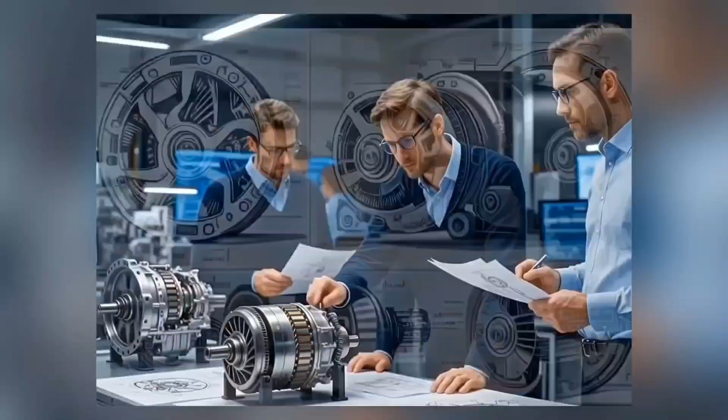These are the engineers who think they've solved the 60-year-old puzzle that killed the rotary engine. They're betting everything that their new designs will revolutionize transportation at the exact moment electric vehicles are taking over the world. The rotary engine has always been the automotive industry's beautiful failure.

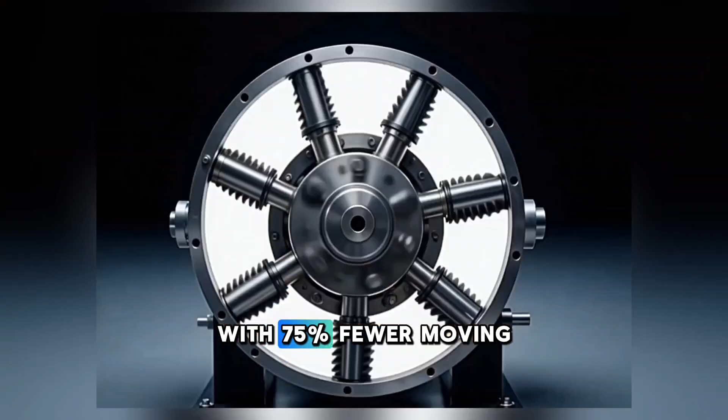Felix Wankel invented it in 1957, and it promised to change everything with 75% fewer moving parts than a traditional piston engine. Instead of pistons pumping up and down, a triangular rotor spins inside an oval chamber, creating power with buttery smooth operation. For decades, only Mazda kept the dream alive with their RX series sports cars.

But in 2012, when the last RX-8 rolled off the production line, it seemed like the rotary engine was dead forever. Now, something unexpected is happening.

In the last 2 years, a wave of startups and established companies have suddenly started pouring millions into rotary engine development. The U.S. Army just handed LiquidPiston a $30 million contract in January 2024.

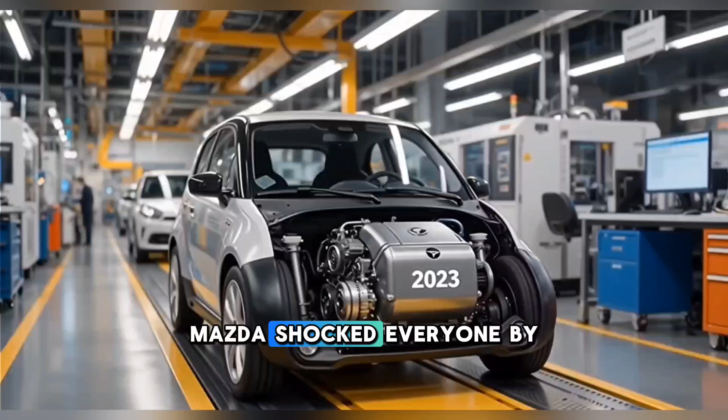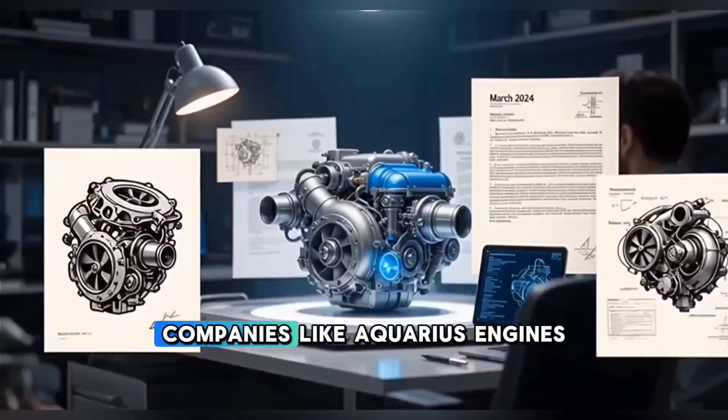Mazda shocked everyone by putting a rotary engine back into production with their MX-30 REV in 2023. Astron Aerospace revealed their Omega-1 hydrogen rotary in March 2024. Companies like Aquarius Engines and INNengine are racing to patent their own revolutionary designs.

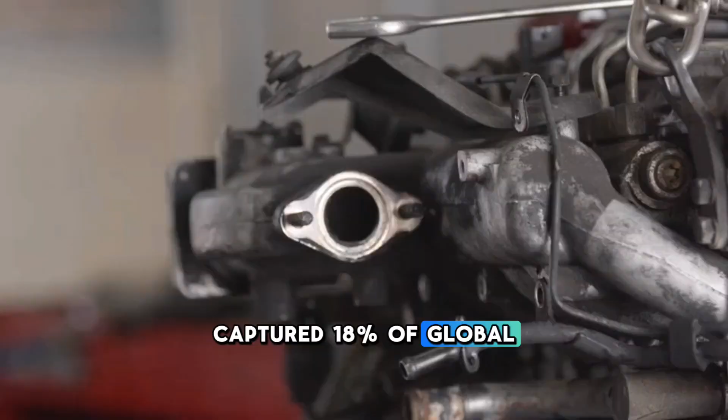Why now? Why are these engineers convinced they can succeed where decades of attempts failed? And what makes them think they can compete in a world where electric vehicles already captured 18% of global car sales in 2023? The answer starts with understanding why rotary engines failed in the first place.

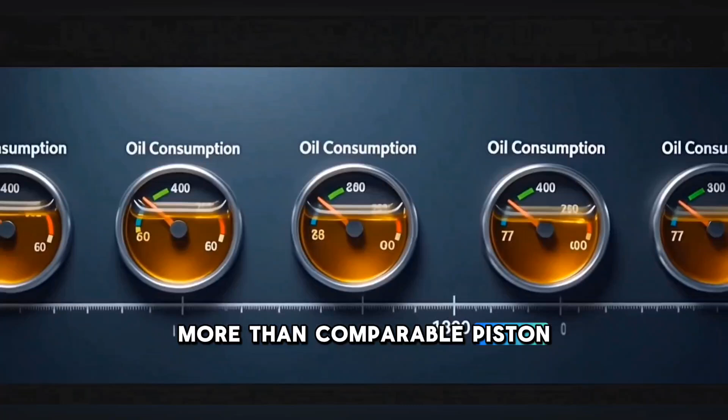If you owned one of those Mazda RX-7s or RX-8s, you know the heartbreak. These engines guzzled fuel like they were dying of thirst, burning 20 to 40% more than comparable piston engines. They consumed oil at an alarming rate, typically going through a quart every 1,000 to 2,000 miles.

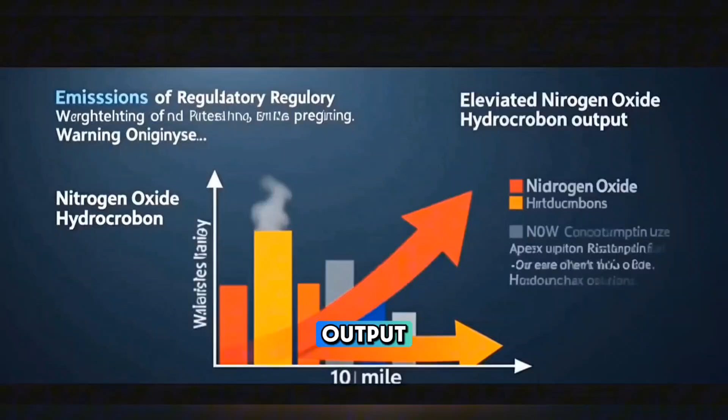The apex seals, those critical components that separate the combustion chambers, would wear out around 80,000 to 100,000 miles, and the emissions, high nitrogen oxide and hydrocarbon output, made them environmental nightmares in an era of tightening regulations.

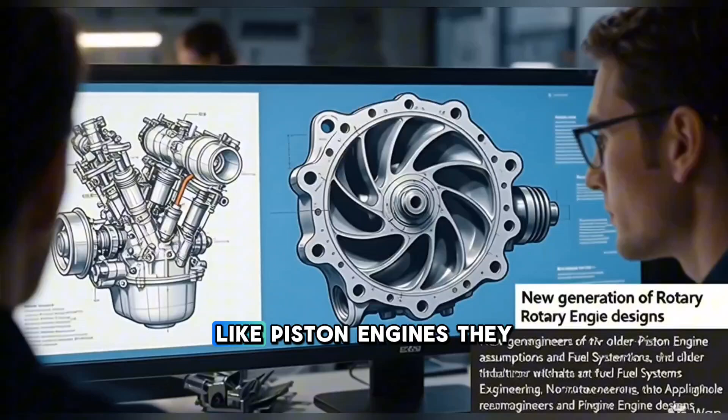But here's what the new generation of engineers realized. Every one of those problems stemmed from trying to make rotary engines work like piston engines. They were using the wrong fuel, the wrong applications, and the wrong expectations.

The breakthrough came when they stopped trying to fix the old problems and started exploiting the rotary's unique advantages. Take LiquidPiston, founded by the Shkolnik brothers, Alexander and Nikolay.

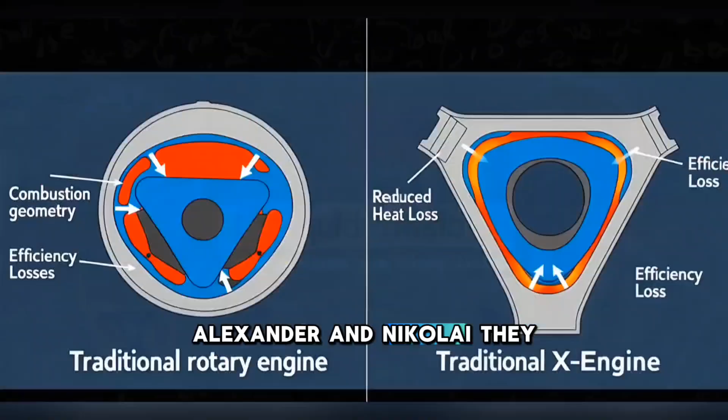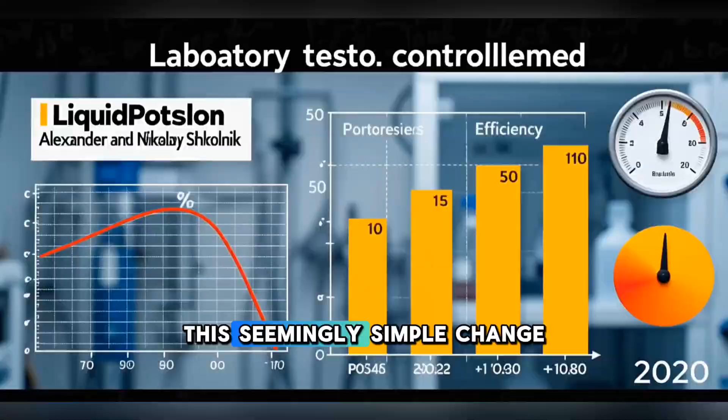They flipped the entire design inside out with their X-engine technology. Instead of a triangular rotor in an oval housing, they use an oval rotor in a triangular housing. This seemingly simple change addresses the fundamental efficiency problems that plagued traditional rotaries.

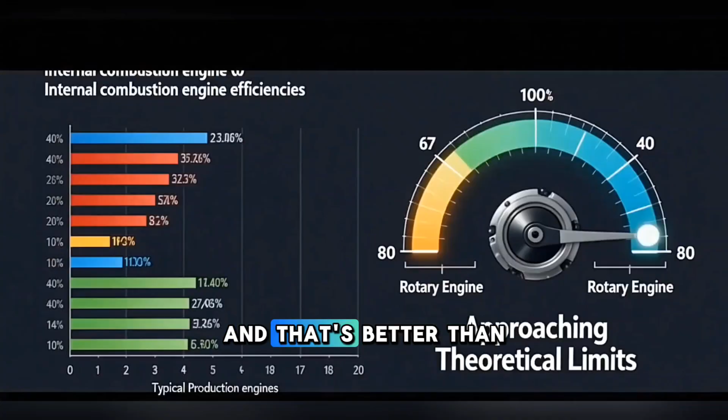In 2020, they demonstrated 70% thermal efficiency in laboratory conditions, and that's better than any production car engine and approaching the theoretical limits of internal combustion.

"We're not trying to compete with EVs, we're complementing them," Alex Shkolnik explained in a recent interview, and that's the key insight driving this rotary renaissance.

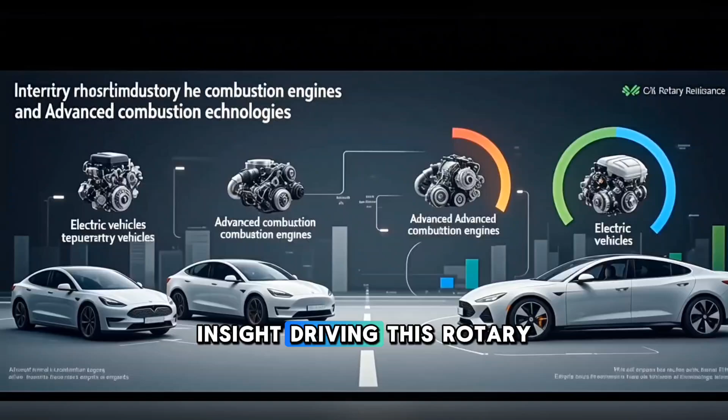These engineers aren't trying to replace your Tesla. They're targeting applications where batteries struggle. Consider the military's interest. That $30 million contract LiquidPiston received, it's for portable generators that soldiers can carry into the field.

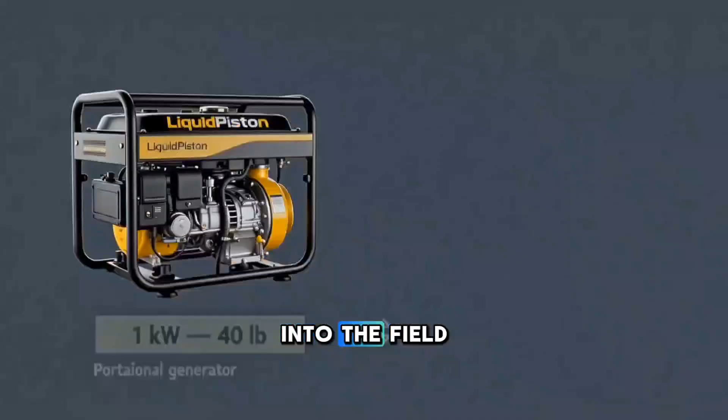A traditional generator that produces 1 kilowatt of power weighs about 40 pounds. LiquidPiston's rotary design delivers the same power at just 4 pounds. When you're carrying equipment through hostile territory, those 36 pounds matter.

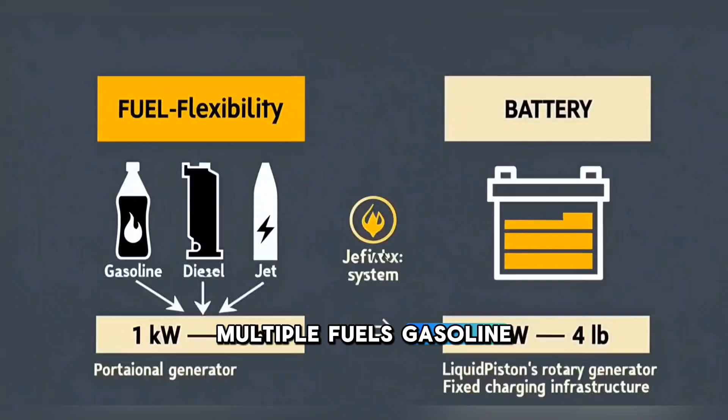The engine runs on multiple fuels: gasoline, diesel, jet fuel, whatever's available. Try doing that with a battery that needs specific charging infrastructure.

But the real game changer might be hydrogen. Mazda's engineers discovered something crucial. The rotary engine is ideal for hydrogen combustion, as one of their engineers stated in 2023.

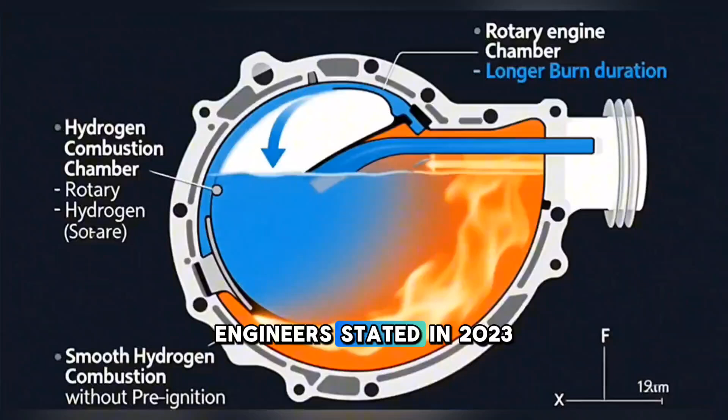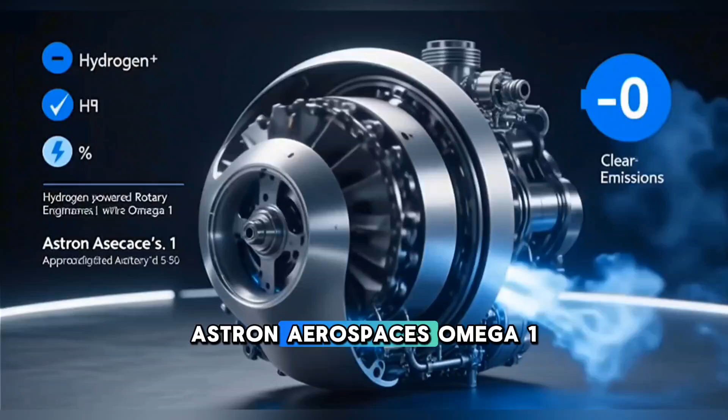The rotary's combustion chamber shape and longer burn duration solve the pre-ignition problems that make hydrogen difficult to use in piston engines. Astron Aerospace's Omega-1 takes this to the extreme, a hydrogen-powered rotary that they claim produces near-zero emissions.

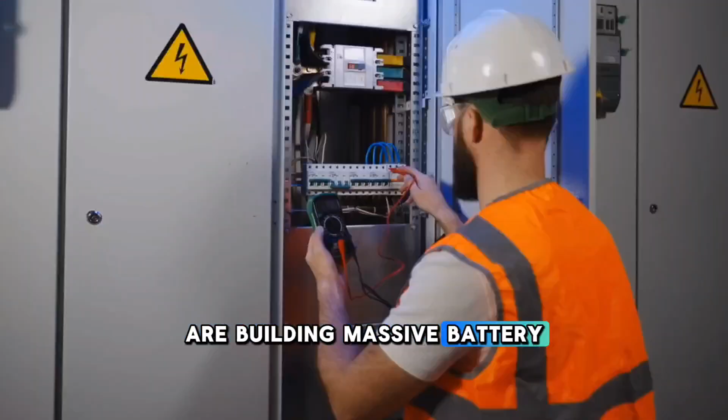This is where the story gets interesting. While Tesla and other EV manufacturers are building massive battery factories, these rotary developers are preparing for a different future. They're betting that the world needs more than one solution to transportation.

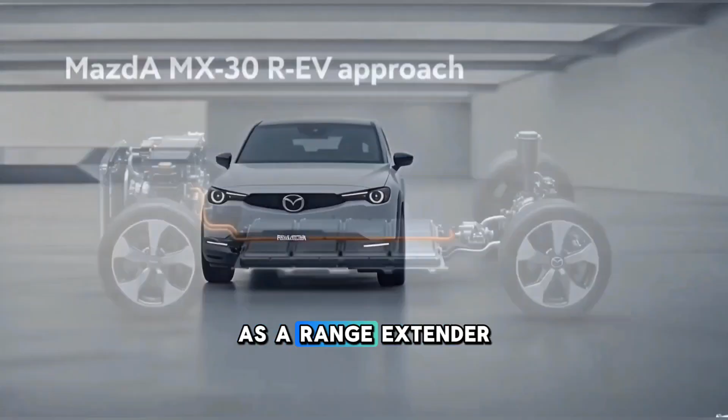Look at Mazda's approach with the MX-30 REV. It's not a pure rotary car, it's an electric vehicle with a small rotary engine as a range extender. The rotary doesn't drive the wheels, it generates electricity to charge the battery.

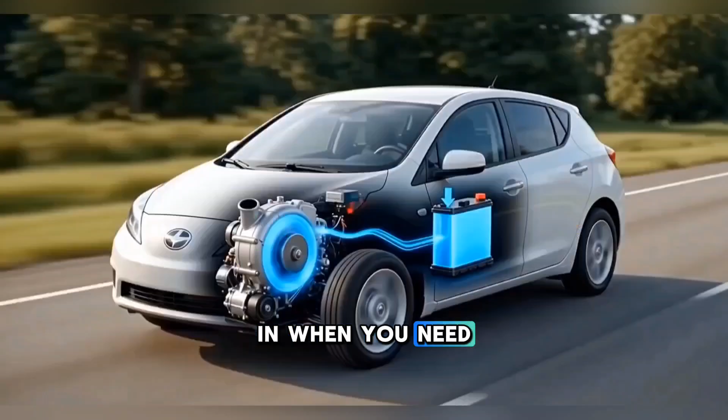This solves the EV's biggest weakness, range anxiety, while keeping the smooth, quiet electric driving experience. The rotary only kicks in when you need extra range, running at its optimal efficiency point.

The numbers tell a sobering story about the EV revolution. Yes, 14.2 million electric vehicles were sold globally in 2023. Yes, the International Energy Agency projects EVs will capture 60% of new car sales by 2030. Battery costs have plummeted 90% since 2010.

The momentum seems unstoppable. But dig deeper and cracks appear. The electrical grid struggles to handle rapid EV adoption.

Charging infrastructure remains spotty outside major cities. Battery production depends on lithium, cobalt, and rare earth elements with problematic supply chains. Cold weather can slash EV range by 40%.

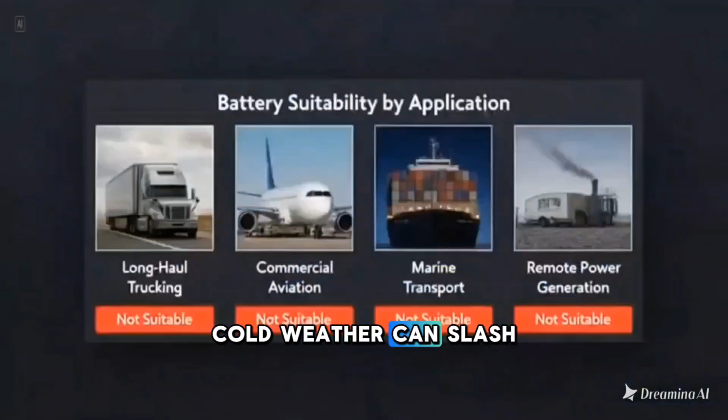For many applications, long-haul trucking, aviation, marine transport, remote power generation, batteries simply don't work. This is the opportunity these rotary engineers see. Not killing the electric vehicle, but filling the gaps batteries can't reach.

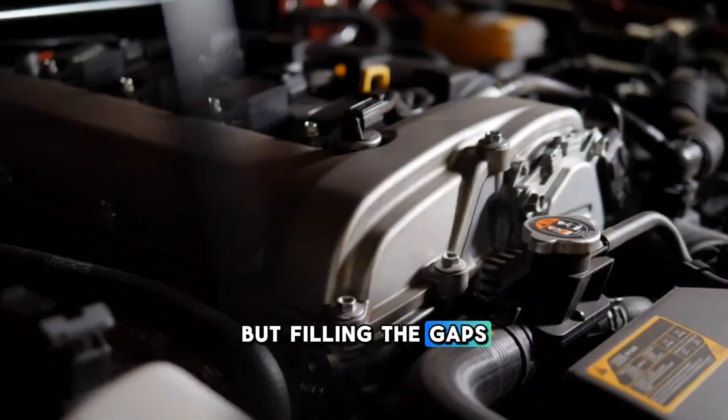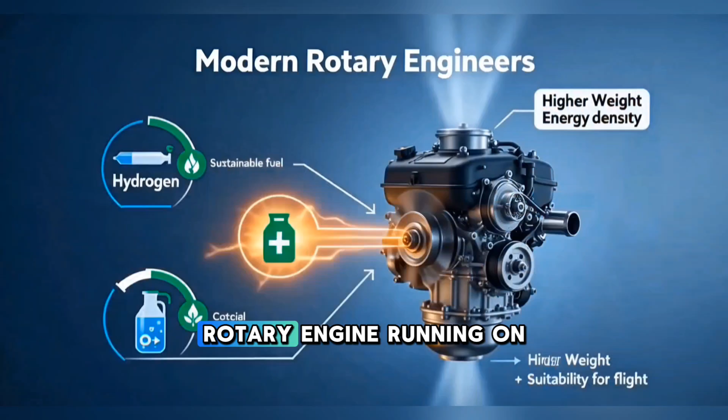Consider the aviation angle. Batteries are too heavy for aircraft. Every pound matters when fighting gravity. But a compact, lightweight rotary engine running on hydrogen or sustainable aviation fuel, that could work. Several companies are already developing rotary engines for urban air mobility vehicles and drones.

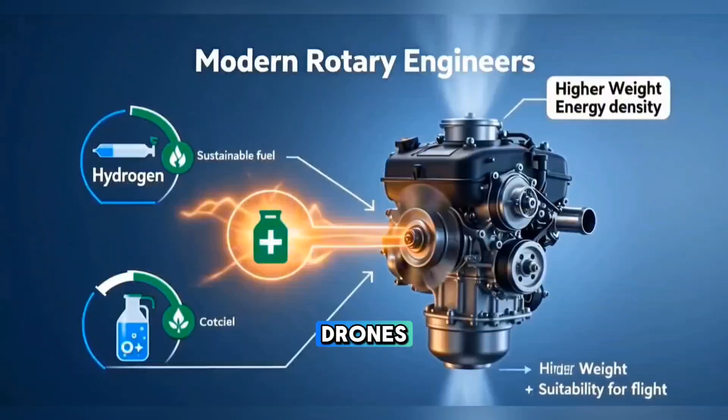Or look at backup power generation. When the Texas power grid failed in 2021, EV owners couldn't charge their cars. But a small rotary generator running on natural gas or propane could keep your home powered for days.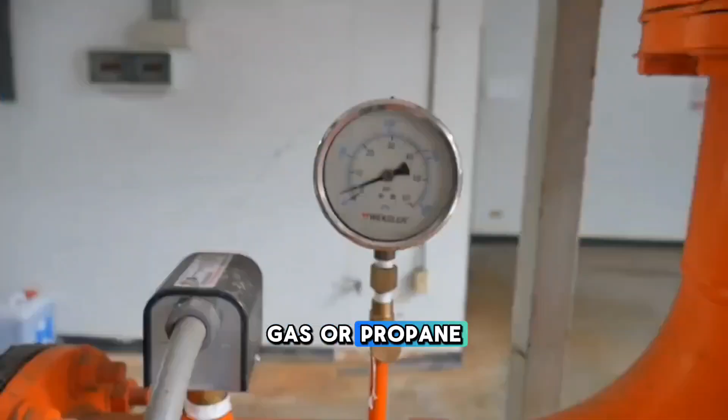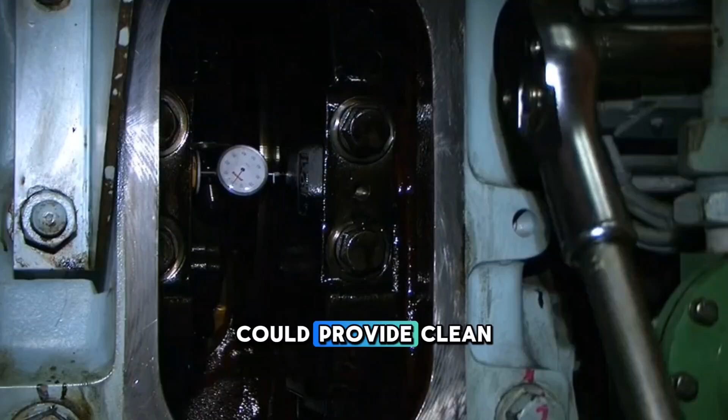The compact size means it fits where traditional generators can't. The marine industry presents another opportunity. Electric boats work fine for short trips, but crossing an ocean on battery power isn't realistic. A hydrogen rotary engine could provide clean, long-range propulsion for ships.

Even in automotive applications, rotary engines might find new life in unexpected places. Performance enthusiasts have always loved rotary engines for their high-revving character and unique sound. What if future sports cars combine electric motors for instant torque with a high-revving rotary for extended track sessions?

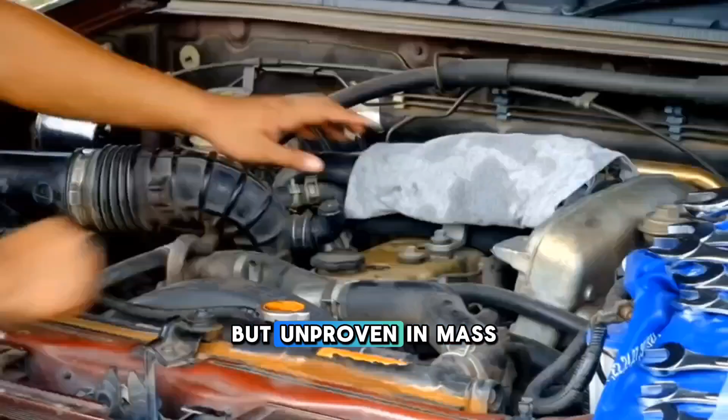But let's be honest about the challenges. Sixty years of failure cast a long shadow. Those apex seal problems? Still not completely solved, though new materials and manufacturing techniques show promise. The efficiency improvements? Impressive in labs but unproven in mass production. The hydrogen infrastructure? Even less developed than EV charging networks.

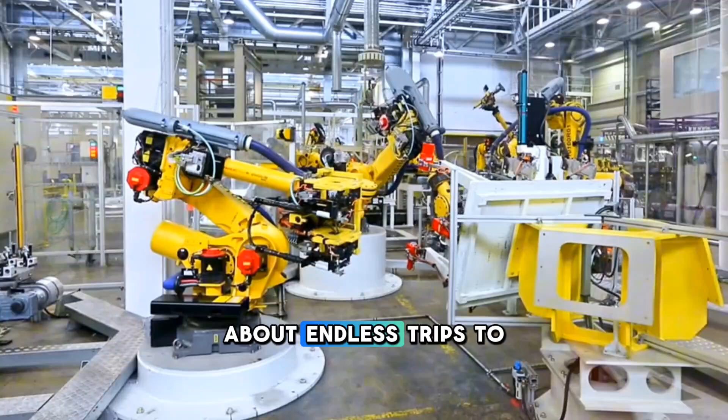The biggest challenge might be perception. Mention rotary engines to anyone who owned an RX-8 and they'll tell you about endless trips to the mechanic. Convincing consumers to trust a technology that burned them before won't be easy.

There's also the uncomfortable truth about market dynamics. The automotive industry has invested hundreds of billions in electrification. Major manufacturers have announced end dates for internal combustion production. Entire supply chains are reorganizing around batteries and electric motors. A few startups with clever rotary designs can't reverse that momentum.

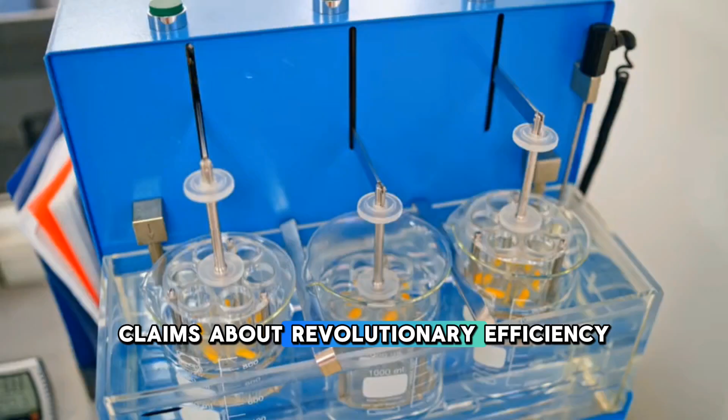Some claims circulating about these new rotary engines deserve skepticism. Despite what clickbait headlines suggest, there's no evidence Elon Musk has commented on any specific rotary engine development. Claims about revolutionary efficiency breakthroughs that will end the EV era are marketing hyperbole, not engineering reality. Most of these new rotary engines target hybrid systems or specialty applications, not direct EV replacement.

So where does this leave us? The rotary engine story isn't about defeating electric vehicles, it's about finding its place in an electrified world. These new developments suggest that place might be larger than anyone expected.

The military applications seem most promising in the near term. Portable power generation, unmanned aerial vehicles, and auxiliary power units benefit from the rotary's power density.

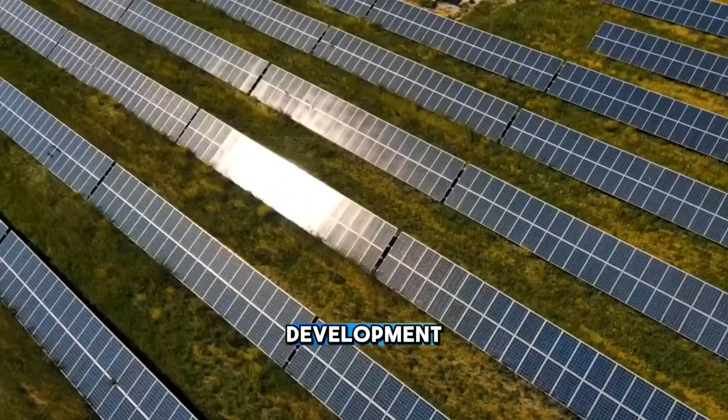Hydrogen combustion represents the biggest wildcard. If hydrogen production becomes cheap and clean through renewable energy, hydrogen rotaries could provide long-range, zero-emission transportation for applications where batteries struggle. But that's a big if, depending on infrastructure development that makes EV charging look simpler by comparison.

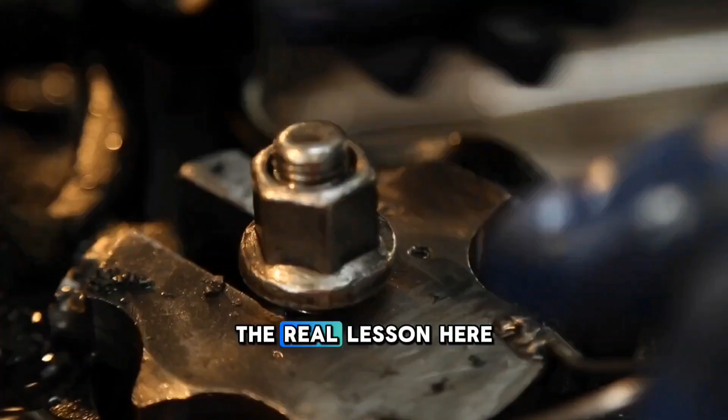The real lesson here isn't about rotary engines or electric vehicles. It's about the danger of technological absolutism. The future of transportation won't be all electric any more than it will be all rotary or all hydrogen. Different applications demand different solutions.

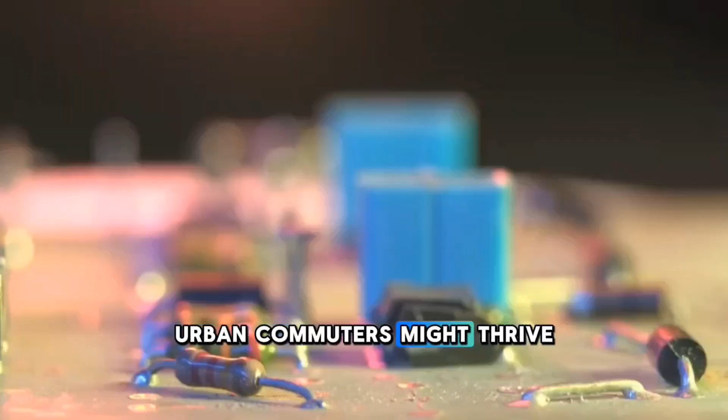Urban commuters might thrive with pure battery electric vehicles. Long-haul truckers might prefer hydrogen fuel cells. Remote communities might depend on multi-fuel rotary generators. Performance enthusiasts might choose hybrid rotary electric sports cars. The winners will be companies that recognize this diversity and develop appropriate technologies for each niche.

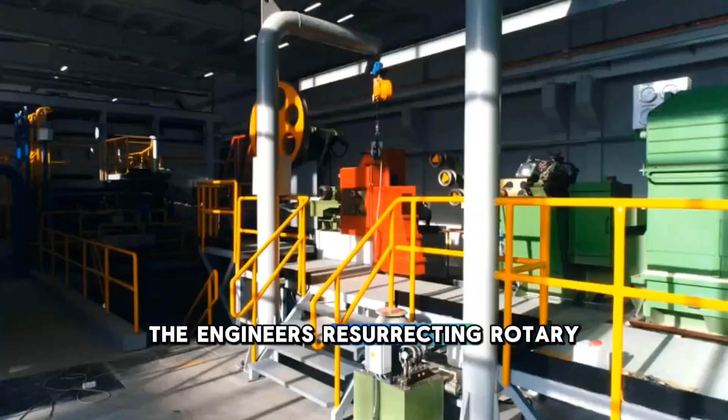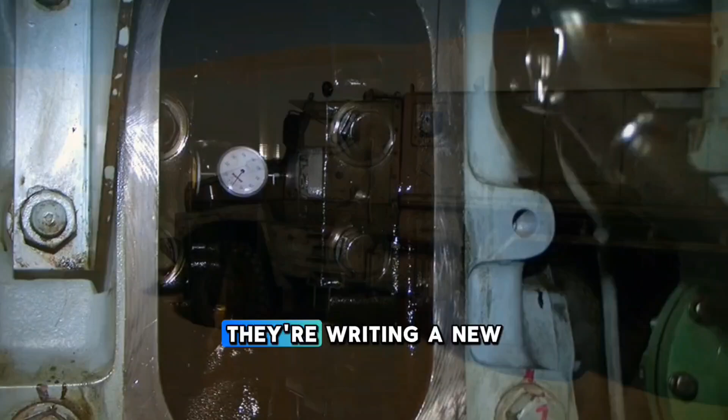The engineers resurrecting rotary engines understand this. They're not trying to recreate the past or stop the future. They're recognizing that a technology's failure in one context doesn't mean failure in all contexts. By reimagining what rotary engines could be, range extenders, hydrogen combustors, portable generators, aviation power plants, they're writing a new chapter for a technology many consider dead.

Will these new rotary engines end the electric vehicle era? No. That headline is nonsense designed to generate clicks, not inform readers. Electric vehicles are here to stay, and their adoption will continue accelerating.

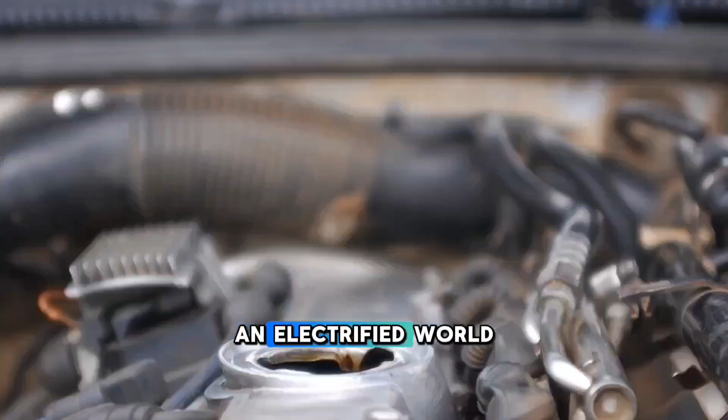But will rotary engines find new life in an electrified world? The evidence suggests they might. The $30 million the Army just invested says they see potential. Mazda, putting rotaries back in production, says they see opportunity. The venture capital flowing into companies like LiquidPiston and Astron Aerospace says investors see possibility. Whether they're right depends on execution, infrastructure development, and market dynamics beyond any single technology.

What we're witnessing isn't the end of the electric vehicle era. It's the beginning of a more nuanced understanding of transportation's future. Battery electric vehicles will dominate urban and suburban driving. But for the edges, the long distances, the remote locations, the specialized applications, there's room for other solutions.

Some of those solutions might spin instead of pump. The rotary engine's greatest weakness was always its inflexibility. It needed to run at high RPMs, couldn't handle varying loads efficiently, and struggled with emissions at partial throttle.

But in applications where it can run at constant speed, like generating electricity, those weaknesses disappear. In applications where power density matters more than efficiency, like aviation, its strengths shine. That's why these engineers are betting everything on rotary engines now, not because they're delusional about defeating Tesla, but because they see opportunities in the gaps.

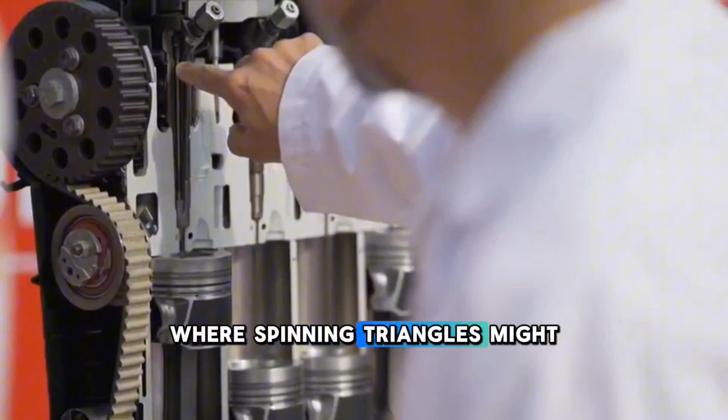They see a world that needs more than one answer to transportation. They see applications where spinning triangles might work better than battery packs. The beautiful failure of the rotary engine might finally have found its moment, not as the universal solution Felix Wankel envisioned, but as a specialized tool for specific problems, not as the star of the show, but as a supporting player in transportation's electric future.

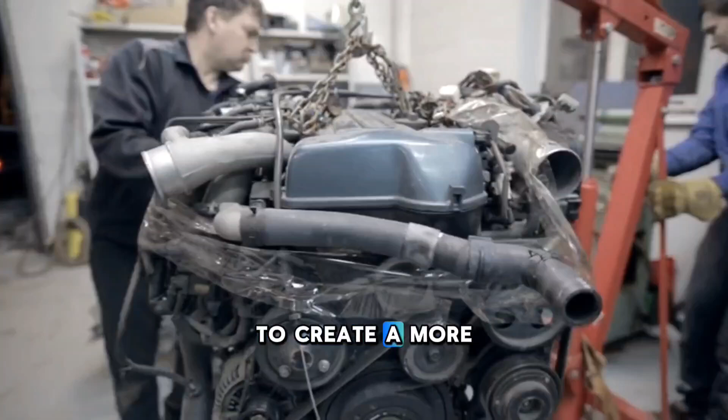After 60 years of searching, the rotary engine might have finally found where it belongs, not replacing electric vehicles, but working alongside them to create a more flexible, resilient transportation system. The engineers pouring their careers into these new rotary designs aren't trying to turn back the clock, they're trying to expand our options. In a world facing climate change, energy security challenges, and diverse transportation needs, we need all the options we can get, even if some of them spin in ways that seemed obsolete just a few years ago.